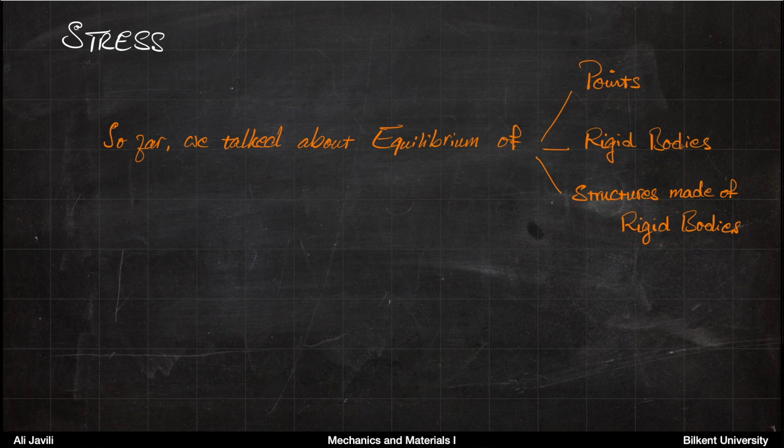Now we want to talk about equilibrium of deformable bodies. That's why we need to talk about stresses, because when we want to talk about deformable bodies, we are interested in the state of the material inside the material. We want to know what is happening inside the material, and stress is a quantity that gives us information about the internal material state.

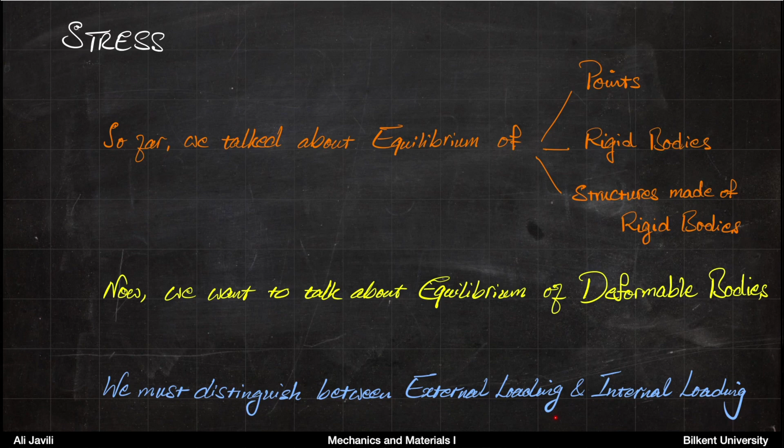So in principle, what we want to do is distinguish between external loading and internal loading. External loading are the usual loads you apply on the structure, such as weight or reactions from the support, and usually you will write governing equations, the balance equations for forces and moments, to compute the external forces.

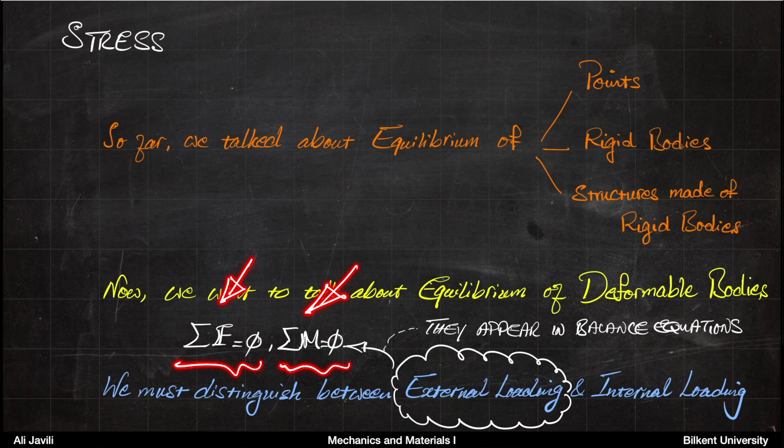And that's what we have done so far. But from now on, we also need to talk about internal loading. Internal loading connects to stresses, and they appear as resultant internal loadings. We will make this more clear through this lecture.

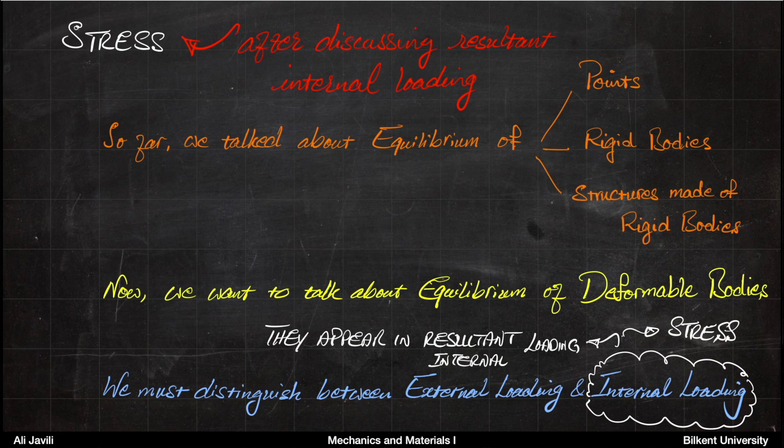So in summary, we have talked about external forces so far. We want to talk about stresses, but before we can, we need to better understand what the internal loadings are, because internal loadings and stresses go hand in hand, and the connection between them should be clear.

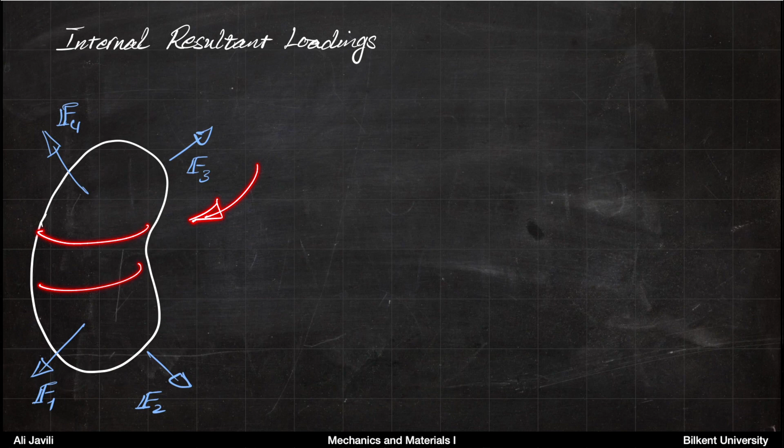Okay, so with that, I would like to talk about internal loadings. For instance, think about a body as shown in the picture. Imagine this is a three-dimensional object, and on that object you have external forces. For simplicity, imagine you have only 4 external forces applied on the body: F1, F2, F3, and F4.

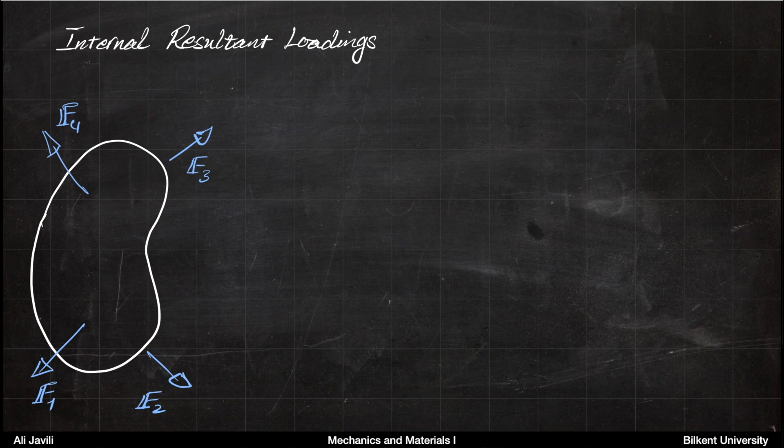What I want to do next is cut this body to make a cross section through it, say through its center, as shown in the picture. And I want to show what happens on that cross section.

If you cut the body, you will see that there are a lot of interactions between the points from the upper part of the body and the points on the lower part. These interaction forces on that surface look like this: very tiny forces acting on different points on the body. Since this is continuum mechanics, a continuous material, I have only drawn a few of them, but you can imagine there are infinitely many.

But then, if you remember, we have learned that if you have several forces acting on a body, you can always replace that by a single force and a couple. So you can replace it with a force-couple system, and that's what we want to do.

So instead of all these tiny forces, we will only be talking about this resultant internal force and this resultant internal moment. This is the resultant internal moment, and this is the resultant internal force.

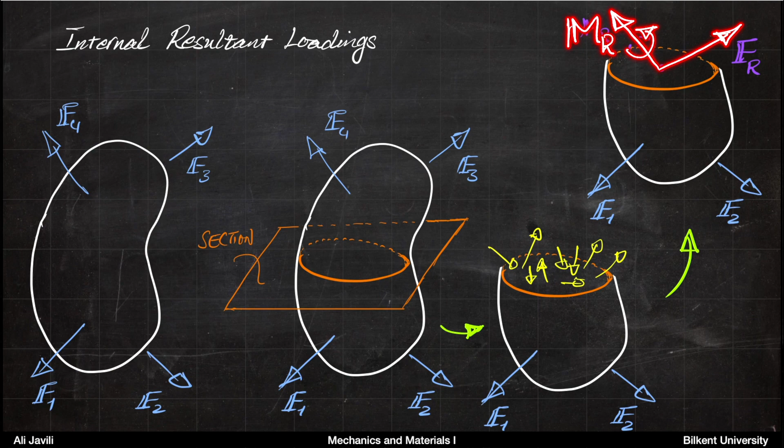Now pay attention, these are internal forces, and they will be in equilibrium with the external forces that remain on that part of the body.

Also remember that the resultant forces and moments are only useful definitions for calculations. Otherwise, in reality it's always a distributed force state like this, but that's usually very complicated to handle in calculations, so we replace them by resultant forces and moments.

Also remember, if I just cut the upper half of the body instead of the lower half, I would see a picture like this. So basically what happens between the upper half and the lower half is this action-reaction kind of scenario.

So whatever force you have on the lower half as a resultant force is caused by all those little forces, whose reactions on the upper body would also exist. So whatever you get for your resultant force, you also get a reaction for the resultant force.

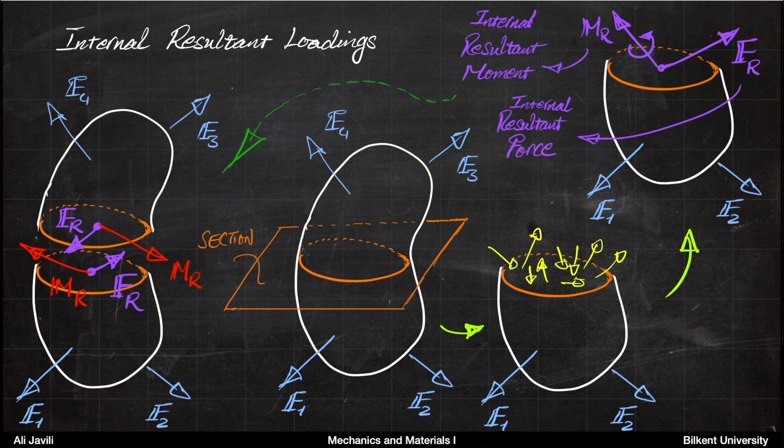This is interesting because usually for external forces, you just talk about one single force with a direction and a magnitude. But for internal forces, you should immediately ask yourself: are we talking about the resultant force on the lower surface or on the upper surface? Internal loadings always appear as combined action-reaction pairs, as opposed to external forces that are always single forces.

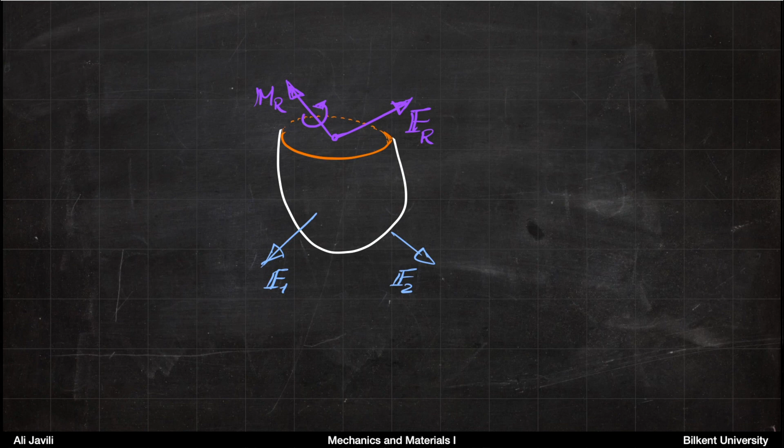Let's talk about that a little more. If we focus on that cut out of the body, and assume that you have the internal resultant force and internal resultant moment, you can imagine that, similar to before, you can also project these forces and moments.

Two types of projections are of particular interest for us. One is the tangential projection, whether for the force or the moment. Here I'm talking about the moment on the left, and on the right the force. If you think about the resultant force Fr and look at the tangential projection of that onto the plane itself...

This will cause a shear. You can imagine this would be a force that wants to cut the material like with scissors - it has this shear type effect. Whereas the normal component is our usual normal force, and it wants to cause an extension or tension in the material. These two components, normal resultant force or tangential resultant force, do two very different things, so we distinguish between them.

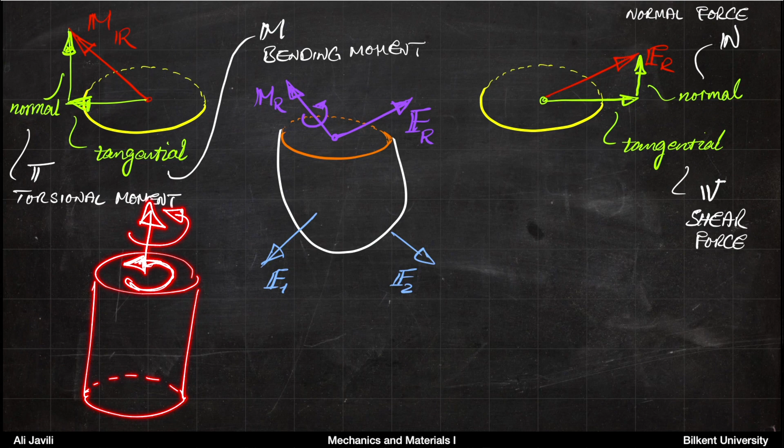We call this torsional moment, also called torque. And you can imagine it wants to result in twist.

Whereas the tangential component of the moment wants to cause bending. This example is slightly difficult to show, but imagine you have a bar, maybe with a rectangular section. If you have a moment like that, it wants to cause bending.

If you think about a moment like this, it's essentially a moment which is tangential with respect to this direction. So essentially, you talk about torsional moment, which is the normal component of the moment, and bending moment, which is the tangential component of the resultant moment.

So again, we have basically four components to look at, and we always decompose these separately. If you think about the same cutout here, instead of the resultant force Fr, we always talk about the resultant shear force and the resultant normal force. The sum of both of these together would eventually be exactly Fr, but Fr alone has this mixed nature.

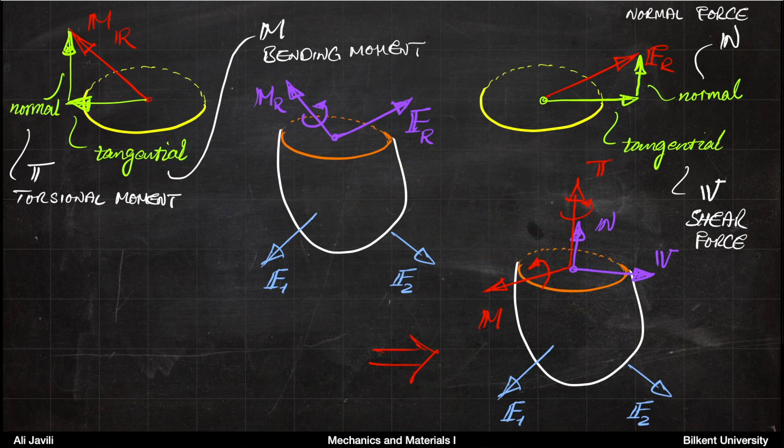In summary, when we want to talk about internal state of the material or internal resultant forces and moments, there are four quantities of interest. One is the normal force N, the next is the shear force V, and these two are essentially the components of the internal resultant force. Then we have torque or torsional moment and bending moment M, and these two are the components of the internal resultant moment.

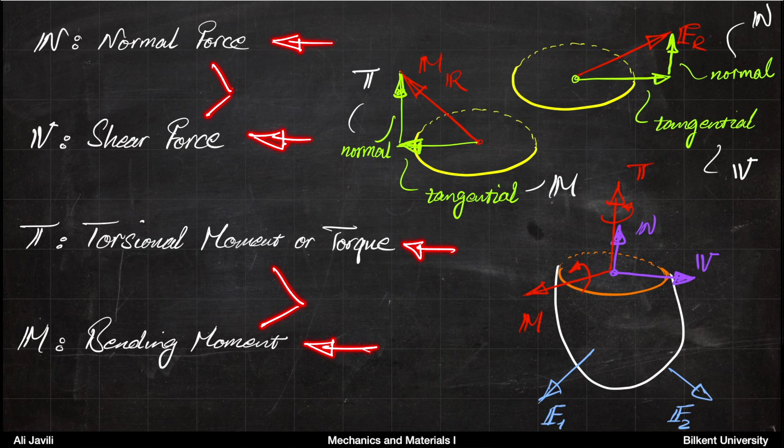To better understand that, here's some additional explanation. The normal force N is perpendicular to the cross-sectional area and is developed to resist against pull and push due to external forces. For instance, think of a simple spring under extension by external forces. If you cut the spring in the middle, the internal force state inside the spring would be a normal force.

If you think about the shear force, on the other hand, the shear force lies on the area, and you can imagine that the shear force is orthogonal to the normal force, and their dot product is therefore zero.

The shear force is developed when external loads tend to slide two segments of material over one another. Imagine a deck of cards stacked on top of one another. When you deform them like this, the forces you need to do this type of deformation is the shear force, because you want to slide segments of material over other segments. Again, if you think about scissors and how they cut material, it's usually through this type of shear force.

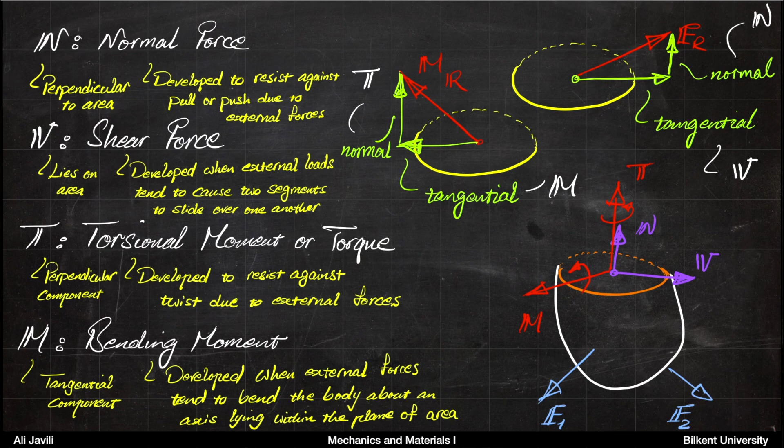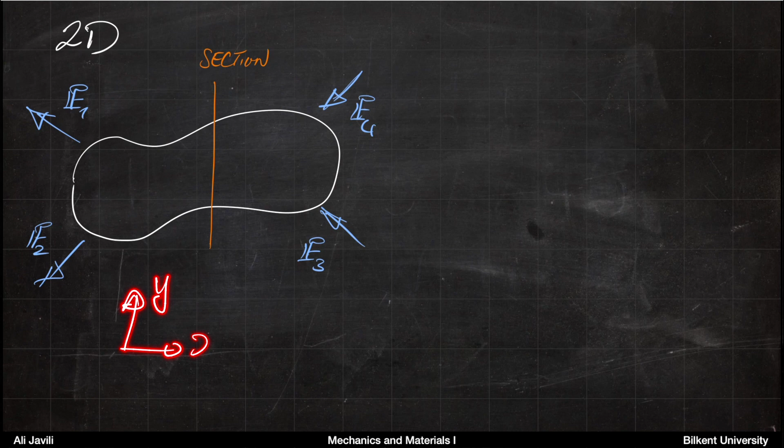But before coming to the exercises, let's see what happens for a two-dimensional problem. It's exactly the same story, just easier to think about. If the coordinate systems are x and y, and you have this cross-sectional area and cut the body through it, you can again think of these different types of reactions, except that in this case you would only get the bending component of the moment, or the tangential component. The torsional component would be out of plane, so in a two-dimensional problem we cannot show it or work with it. So for a two-dimensional problem, you talk about normal force, shear force, and bending moment.

Remember, for a two-dimensional problem, you usually have three equations for equilibrium: balance of forces in the x direction, in the y direction, and balance of moments. If you assume this is your coordinate system, the balance of forces in the x direction gives you the normal force N, balance of forces in the y direction gives you the shear force V, and balance of moments with respect to any point gives you the bending moment M.

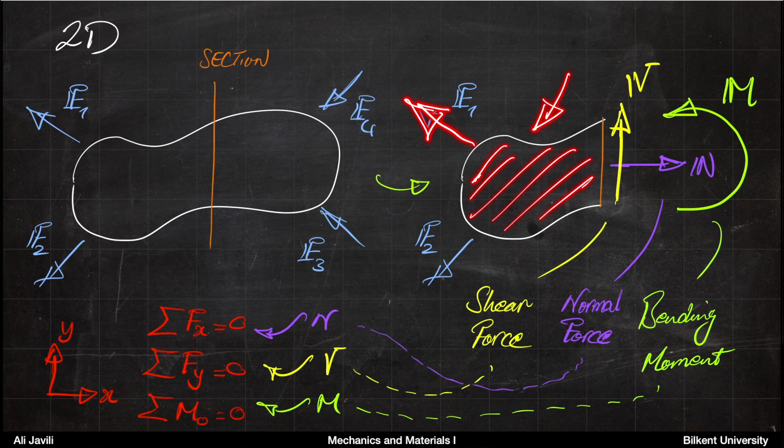Remember, these are internal. We had forces and moments before, but these are internal forces. So you write this balance of forces as the balance of internal forces versus external forces on a section of the body. If you look at that section, on the left part you have external forces, on the right part you have internal forces and moments.

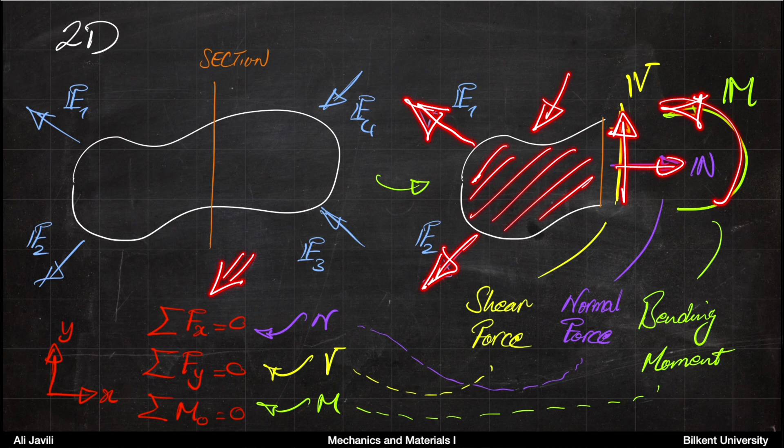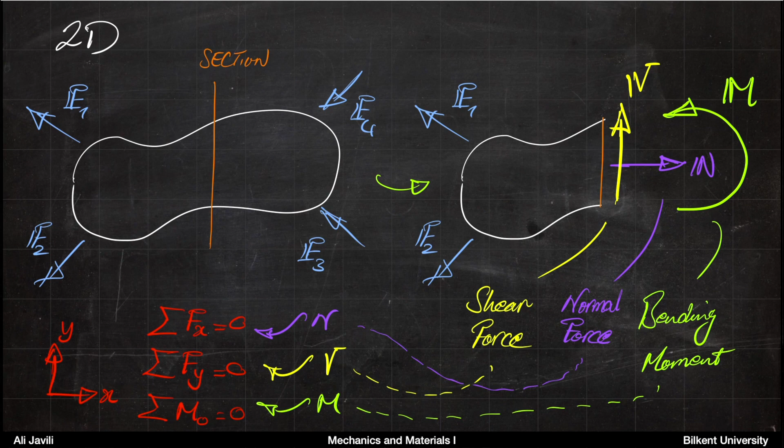Now these balance equations are the same equations in principle, but they have this interesting feature that they include both internal and external reactions, or forces, inside them.

Okay, so what we want to do and the procedure for analysis for the examples that come are essentially similar to what we did for method of sections. So when you want to calculate the internal forces and moments, whether it's a 2D problem or a 3D problem, you need to cut the material at a cross section of interest.

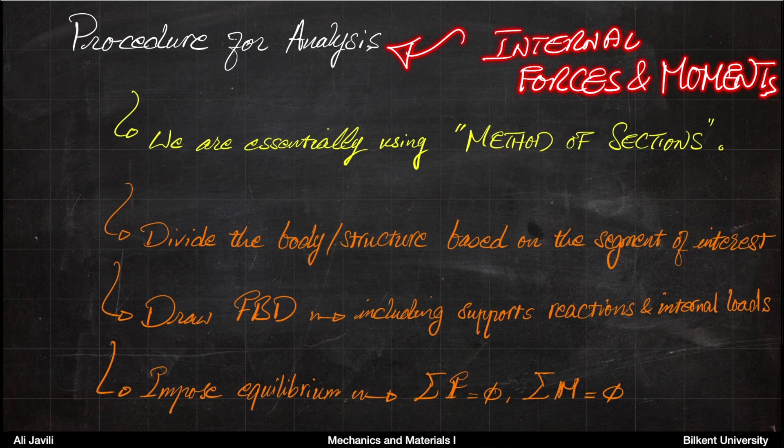Once you cut the material at that cross section of interest, which looks very similar to what we did in method of sections, then you divide the structure based on the segments that you get. So if it is one cut, then you get, let's say, left and right segments. And then you draw the free body diagram on that.

Remember, for the free body diagram, you should include support reactions and weights, but also you should remember to include internal forces. So these would be external ones together with weights and other external forces, and then you should always have internal loads, and then you impose equilibrium. And as I said, the equilibrium equations have this interesting mixed feature that they include both internal forces or internal loads and external loads.

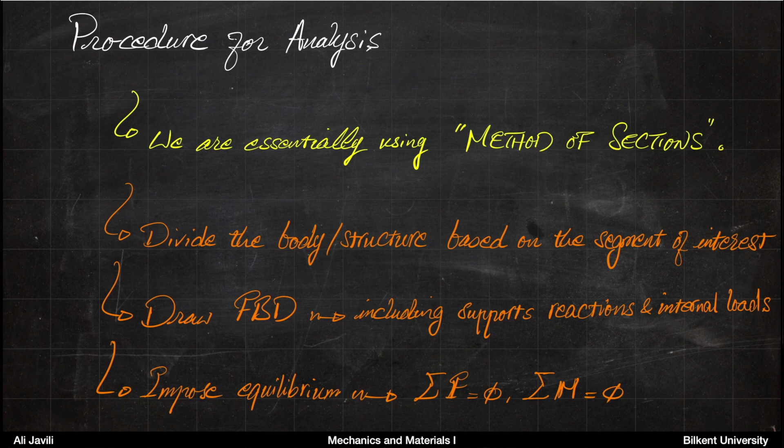We have two examples that come now, and we will learn these through exercises together.

Our first exercise today is similar to problem 1.1 on page 11 of the Hibbeler book, the 9th edition. Given is the beam clamped on the left hand side, so you have a fixed support here and it can apply forces in x and y direction as well as a moment.

On top of the beam, you have a distributed load as shown in the figure. It starts from 0 and it comes all the way to 270 Newton per meter. You are asked to determine the resultant internal loadings acting on the cross section at C. So basically the question is, if we cut the structure here, what are the resultant loadings? Remember, it's a two-dimensional example, so the resultant loadings would be N, V, as well as M: normal force, shear force, moment.

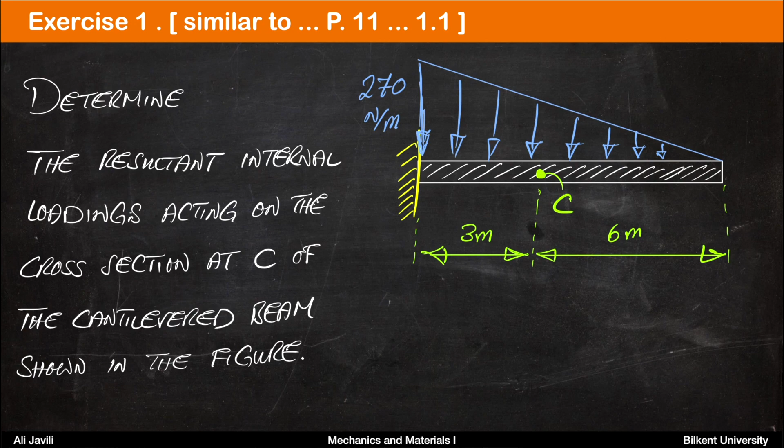Before we start jumping on the solution of the problem, we need to have a very important definition, and this definition appears in all the problems similar to this throughout the semester, and we will have a lot of those. So it's very important that you very well understand what I mean by this definition and this convention.

We have done a very similar thing when we talked about truss structures. Remember, we talked about the forces and force directions. If you talk about external forces and external moments, usually you define their directions based on the coordinate system that you define. Whereas if you talk about internal forces and internal moments, talking about just the coordinate system is not enough, because for instance, you can think about a little cut out of the member like this.

So let's say we cut a little piece here. If you cut a little piece of the material, then in order to have that under tension, you need to have forces in opposite directions anyway. If you want it to be under compression, you should also have forces that are opposite to each other. So you cannot exactly talk about the direction of the forces, because then on the left and the right, they have different directions. So for that matter, we decided to define something better than just direction, better than the usual direction based on the coordinate system.

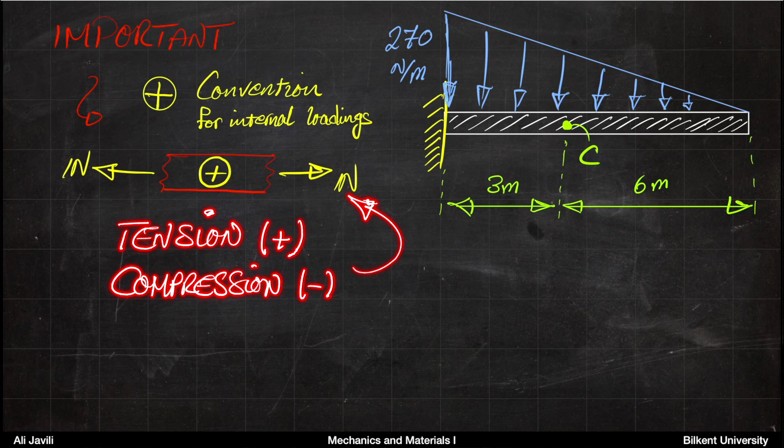Based on this definition, this would be the graphical representation of the convention that we used for the internal loadings, but only for normal force. So for the normal force, that's how we define our plus convention, and this is exactly in accordance with what we did for truss members.

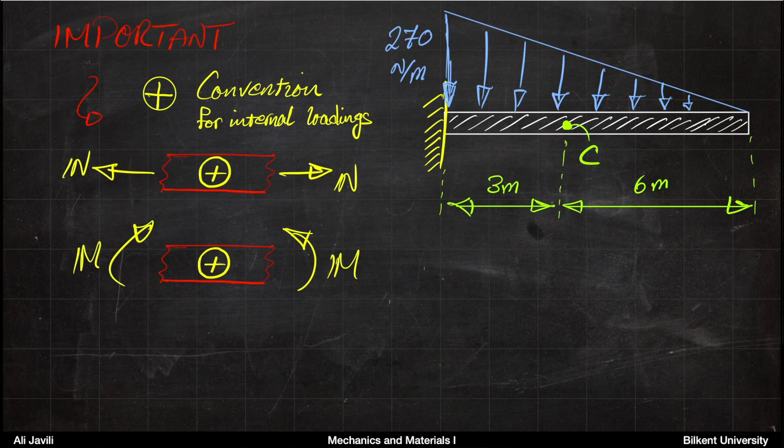Now we do the same thing for bending. For bending, we also need to define a convention, and then we assume that if you have a bending moment, so if the member wants to bend like this, so you can imagine if you pour water, it holds the water - that would be our plus convention for bending moment. And then again, you can imagine on the left and on the right, you would need opposite moments to make that happen, because this thing should be in equilibrium.

Okay, so you cannot say for the whole member what is the direction. On the right hand side, the direction is counterclockwise. On the left hand side, the direction is clockwise.

Okay, so this combination of directions would cause a plus convention for moments. So that's what we call positive moment, positive internal moment. Again, it's important that we are talking about internal moments. And that's where the whole complexity is coming from.

So then we need to also define something for the shear forces. If on the left hand side the shear force is upwards, on the right hand side it is downwards. So maybe you want to imagine that it tries to turn the piece clockwise. That would be our plus convention for the shear force.

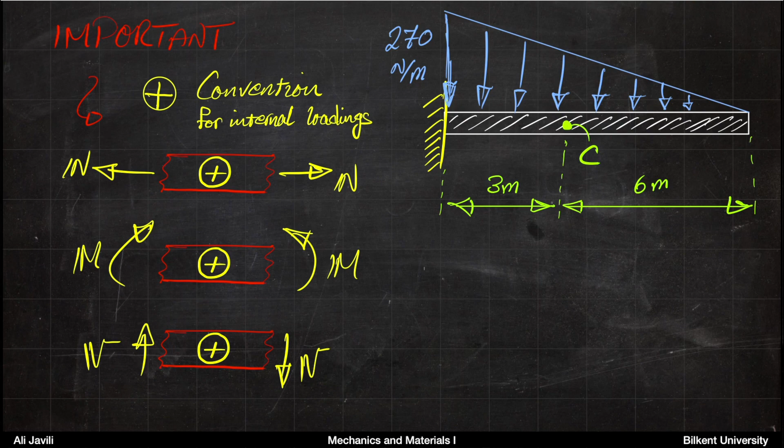Okay, so this convention is extremely important for what we do from now on, and we hold to this for the rest of the problems, for the rest of the lectures in this series.

So in summary, if I want to combine all three of them in one picture, this would be the picture you are looking at. So again, if you talk about normal forces, plus direction for normal forces means on the right edge, it's pointing towards right. On the left edge, it's pointing towards left.

For V, it means on the right edge, it's pointing downwards. On the left edge, it's pointing upwards. And for the M moment, it means on the right edge, it's counterclockwise. On the left edge, it's clockwise.

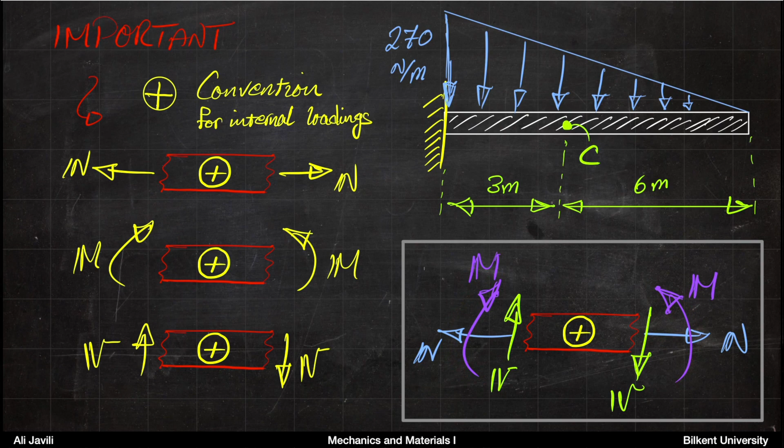So having said that, now we can draw the free body diagram for this system. In order to draw the free body diagram, the first thing we always do is to replace the distributed forces by a single force, by a single equivalent force.

And you can see here the length is 9 meters. It's a triangle. And the maximum of the force density is 270 Newton per meter. That means the area of the triangle is 270 times 9 times 1 over 2, and that would be 1215 Newton.

So that's the value. Where does it act on? What is the location of that? That would basically be the centroid of that triangle. So we know that if it is 9 meters, the distance from left for that centroid would be 3 meters.

From left and 6 meters from right, or if you want to think about it, it's 1/3 times the height from left, and 2/3 of the height from the right, from the peak. Okay, so that's that.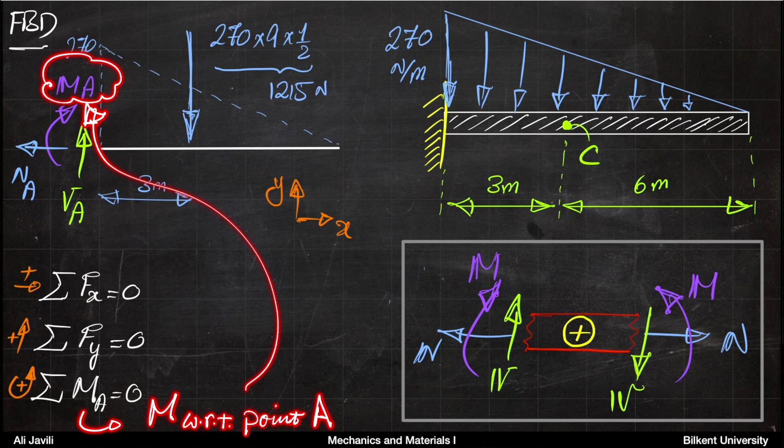Okay, this is not exactly the same as we say here. So here, when I'm writing MA, this is actually the moment at A, but obviously here I mean moment with respect to A. But this shouldn't cause confusion. Although we write both of them as just MA, I think it should be clear if we mean the value of internal moment at A, or we just mean moments with respect to point A.

So if you do that now in the x direction, we have only one force, and assuming that this is the plus direction for x, that force comes with a minus sign, so you get minus NA equals 0.

For the vertical direction, assuming upwards is the plus direction, you get VA upward and 1215 Newton downwards. That's your balance equation in the y direction. Obviously, if you chose different directions for the xy coordinates, you would eventually get the same values for V and N. So it doesn't matter how you choose your coordinate system, as long as you are consistent.

For the moments, the balance of moments with respect to A: you have the equivalent force of 1215 at a distance of 3 meters, and it wants to cause a clockwise moment. We usually assume the plus moment direction is counterclockwise, so that comes with a minus. But also the moment we draw at A, the internal moment at A, is also clockwise itself, so it also comes with a minus.

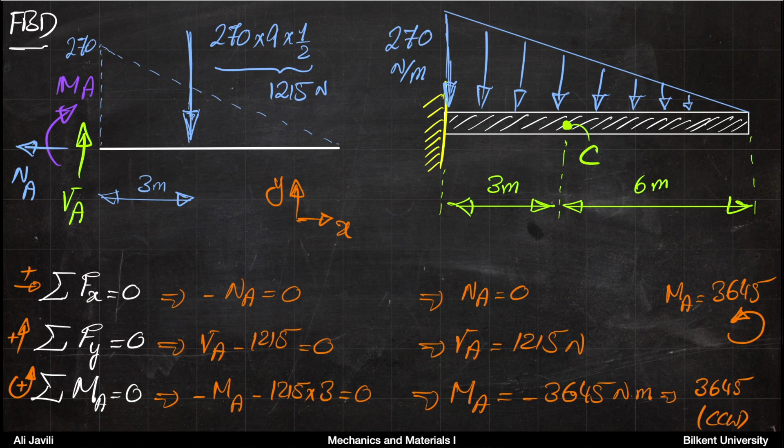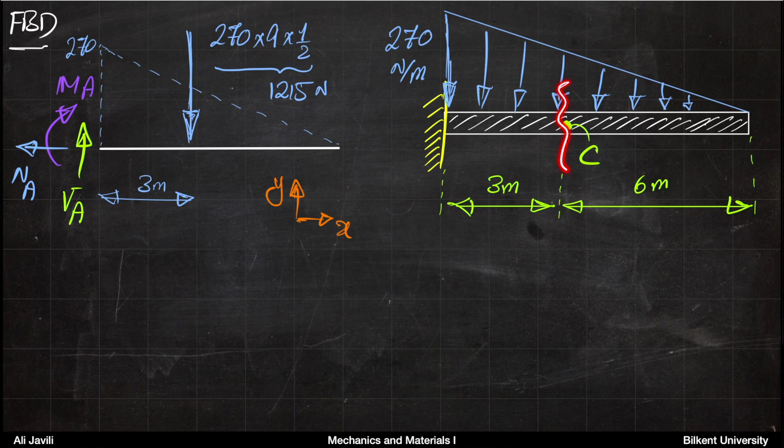So we have that. Now we want to calculate the internal forces and moment at C. What we need to do is cut this structure between A and C. If we cut the structure between A and C, we would have this little part, and then this would be your external forces, your external distributed forces, and then you also have the reactions from A. But also you would have your internal loadings at C itself.

If you put them all together, this would be the new free body diagram. For this free body diagram, I have already chosen the values from the previous part. We know MA is 3645 and counterclockwise, so I already put it like that. And we know VA is 1215 upwards. So we have this. And on C, on the right edge of the cutout, the plus direction for VC would be downwards. For NC, again it's in the extension direction, so it would be towards the right. And for MC it would be counterclockwise.

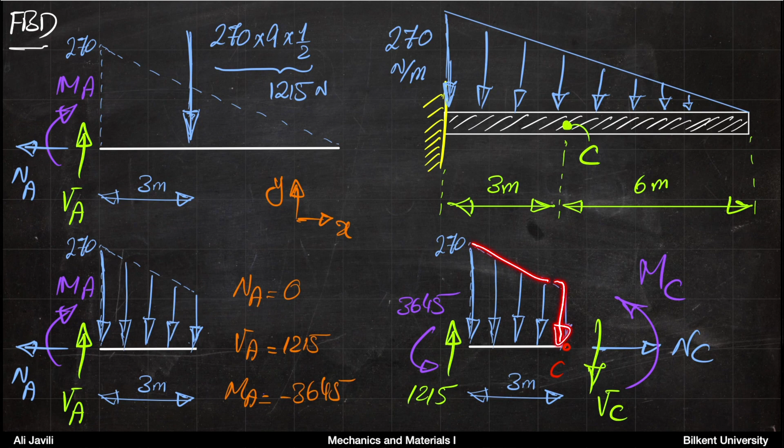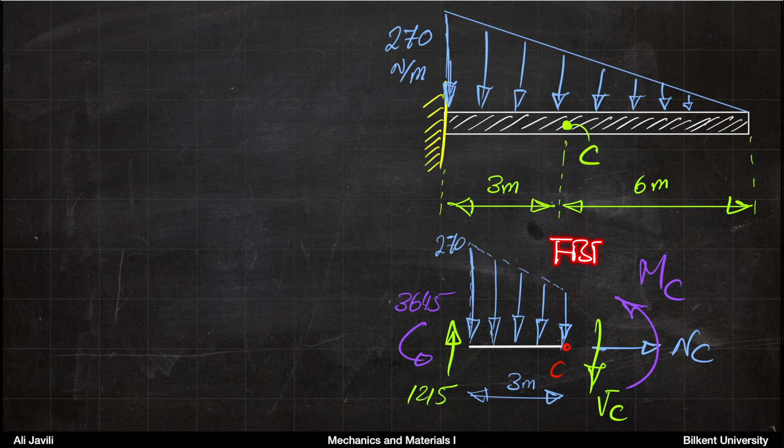All you have to do is treat this free body diagram as you would usually do any free body diagram. The first thing you want to do is calculate the equivalent force for the distributed forces that you have here. If I just clean up the additional parts, this is the free body diagram we want to proceed with.

If I enlarge that piece, you can see you have 270 Newton per meter on the left, but the slope of the line is 270 divided by 9, so it's 30. That tells you that at distance 6, remember this is 0 here, it would be 180 here and 270 here, because the slope is 30. So per 6 meters you get 180, and per 9 meters you get 270.

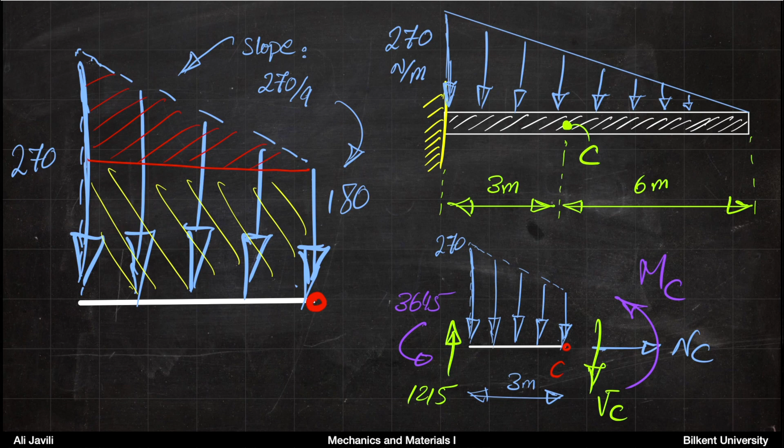So now that we know the state of the distributed load, all you have to do is split this into figures that you can easily calculate. In this case, you can see there is a nice rectangle at the bottom and a triangle on top, and you can handle them separately and add the resultant parts together. If you think about the rectangular part, the distance is 3.

The distance is 3, the height is 180. So the area of that rectangle is 180 times 3, that is 540 Newton, and it acts in the middle. So its location would be in the middle of the 3 meter, that would be 1.5 meter.

If you do the same thing for the triangle, the area of the triangle would be the height here, which is 90, the base is 3, and then you have factor 1/2, so you get 135 Newton for the triangle. And then the distance would be height divided by 3 from the base. In this case, it would be 1 meter.

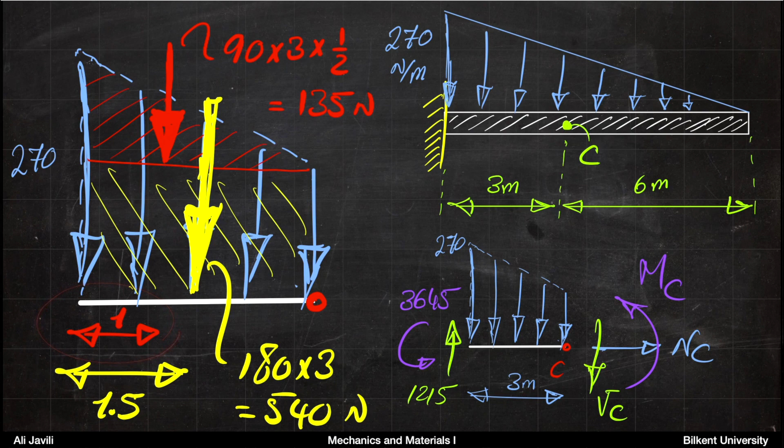So if you put all this together, essentially this is what you have. This would be the 540, the resultant force from the rectangle. 135 is the resultant force from the triangle, and they act at the distances 1.5 meter and 1 meter respectively. And then you have the forces at A, you have these 3 unknowns at C. All you have to do is treat this as a common free body diagram and apply our usual governing equations. In 2D these are balance of forces in the x direction, in the y direction, and balance of moments with respect to a point, let's say A.

If you do the balance of forces in the x direction, you can see you have only NC, so NC would be 0. For the balance of forces in the y direction, you have 540 downwards, 135 downwards, so they both come with a minus. You have 1215 upwards, and then you have VC downwards. So you get VC to be 540.

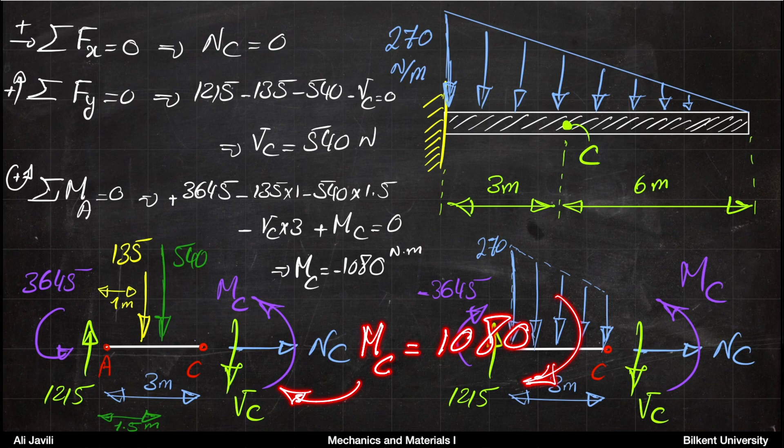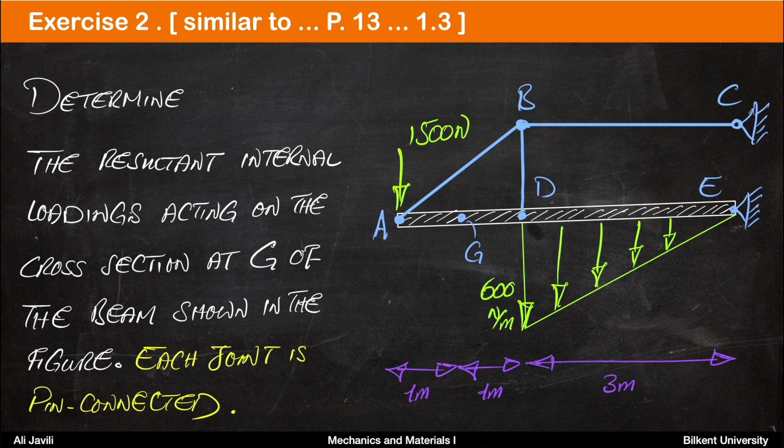So that's what we do. We start with the free body diagram of the entire system. If you draw that, then at point E and C, you would get reactions in both x and y directions. They are both fixed, or hinged, so you get two forces. None of them is a roller, so each of them would give you two unknowns.

Then you replace the 600 Newton with one equivalent force. So it's 600 times 3 times 1 over 2, so the force would be 900. And the distance of the force from D would be 1 meter, again one third of the height, or 2 meters from E, as it's shown here.

Okay, so this is the free body diagram. Now, from this free body diagram, we need to calculate the support reactions. However, there is a little problem here, because we have a two-dimensional problem. We have three equations, our usual governing equations, and that's all we have. And we have four unknowns. So what do we do?

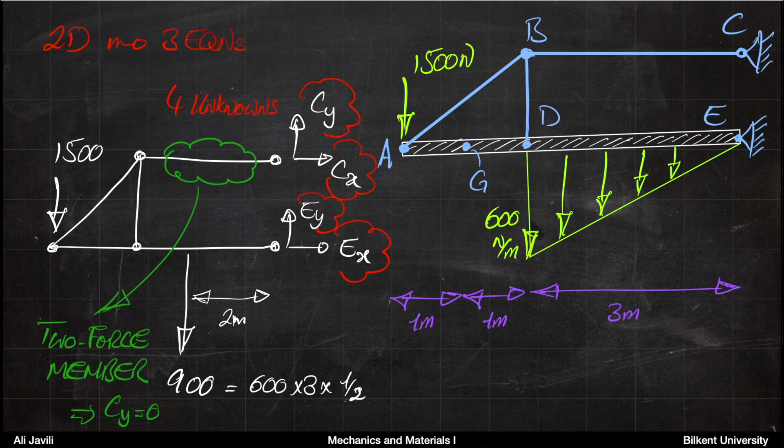So basically that tells us that Cy cannot exist. The only force that you can have along the member would be Cx. That's a huge relief, because now you know you only have three unknowns and you can solve them with your three equations. The three equations, again, we do balance of forces in the x direction, balance of forces in the y direction, and balance of moments with respect to any point, in this case with respect to point E, and we also pay attention to the plus direction as we always did from the beginning of the course.

So this is a very standard problem right now. All you have to do is write these balance equations. In the x direction you get Cx and Ex, so the sum of Cx and Ex is 0. In the y direction you have Ey upwards, you have 900 downwards, and you have 1500 downwards, so they come with a minus sign.

And then with respect to point E, if you want to write the moments, assuming counterclockwise is the plus direction as we did, you can see that the force 900 would be multiplied by a 2-meter arm, and it wants to cause a moment in the counterclockwise direction, so that comes with a plus sign. Then you have the force 1500 with the distance 5 meters that also causes the moment in the counterclockwise direction, so also comes with a plus sign. So 1500 times 5 meters.

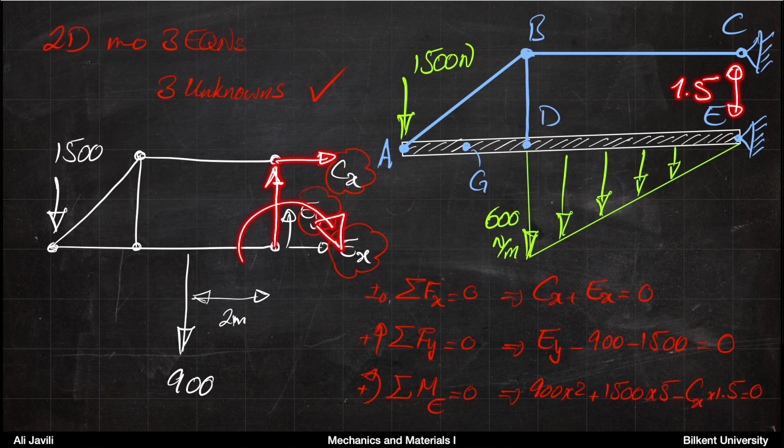And then the force Cx has the distance of 1.5, so the distance between C and E is 1.5, and it wants to cause a rotation in the clockwise direction, so it comes with a minus sign. So basically you get these three equations, and from three equations you can calculate the three unknowns. Cx would be 6200, Ey would be 2400, and Ex would be minus 6200. And that makes sense because you can imagine these two forces are the only forces in the horizontal direction, they need to cancel each other, so one of them is just the opposite of the other one.

Okay, so until now we have the reactions from the supports like we usually did for truss structures. The next thing we want to do is move forward and calculate the force in AB. In order to do that, we need to split the structure.

So if you think about it, you can cut this at member BC, or basically you can imagine, similar to what we did in method of joints, since we know Cx is 6200, FBC would be 6200, and that would be a tension, so it comes with a plus sign. From the direction you can clearly see this is a plus direction, it's a tension.

So what you want to do next is basically write the equilibrium of forces on joint B. On joint B, now you know FBC is 6200. You don't know what FBA is, you don't know what FBD is. So you don't know this, you don't know this, you know this one. But then you basically have two unknowns and you have two equations.

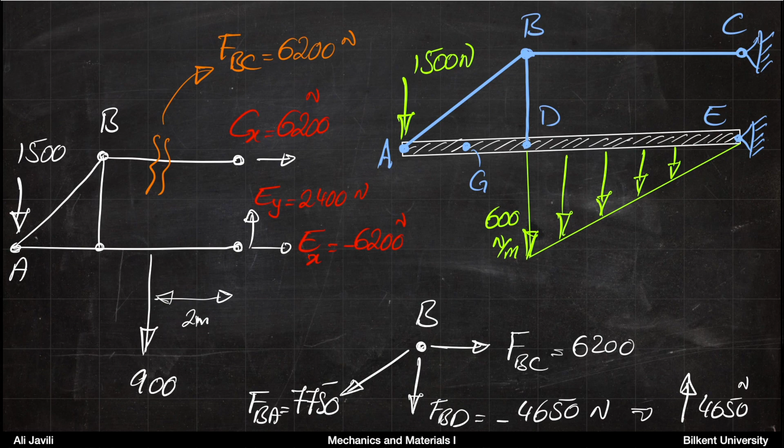All right, we are almost there because now you know exactly what is the force in member AB. And once you have that, you can cut the structure like this, and we can tackle the main part of the problem, which was to find the internal loadings at G.

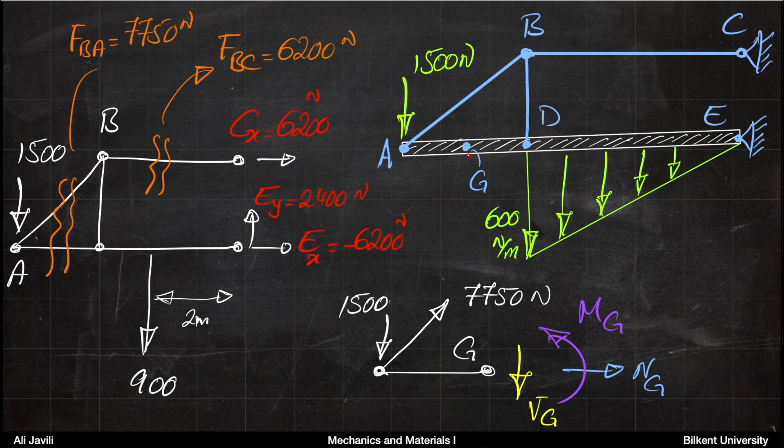If you cut the structure like this, you know that at A, you have just 1500 Newton downwards. You have FAB, again in the tension direction, so that's 7,750 Newton. And then for G, you should remember our convention.

If you cut it like this, G is the right end. So the convention would be to have the shear force downwards, the normal force pointing towards right, and the moment to be counterclockwise, to be positive. So we draw them, and now you have a much simpler problem to solve.

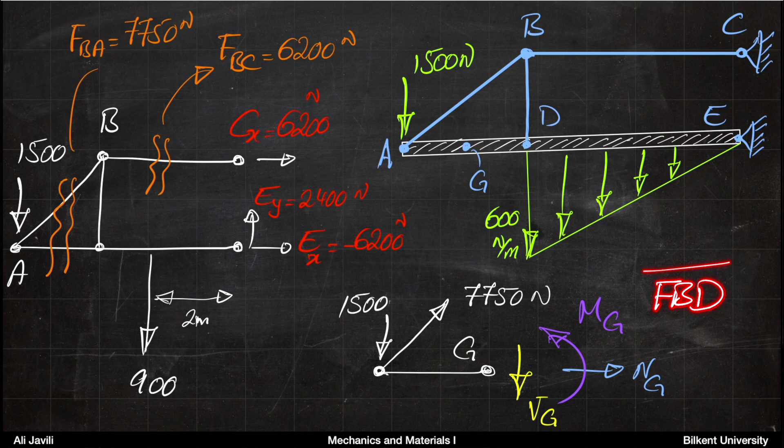It's again a very, very common problem. It's exactly like a free body diagram, and all you have to do is write your balance equation for this free body diagram.

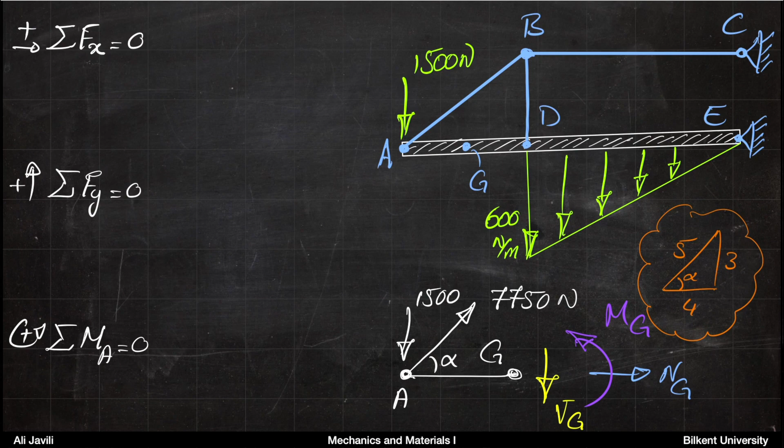Also, remember that this angle alpha follows the famous triangle. The distance here is 2, the distance here is 1.5, so basically the distance AB would be 2.5. So it has the 3, 4, 5 triangle. So we know what alpha is, it's not an unknown. Anyway, this is the free body diagram.

And then you can write your governing equations again: balance of forces in the x direction, in the y direction, and balance of moments. At this point, you just treat this as usual, as if these are all external forces. You don't have to be concerned about anything.

In the x direction, you would have Ng plus the horizontal component of the force, so 7,750 times cosine alpha, the sum of those would be 0.

In the y direction, you have 1,500 downwards, Vg downwards, so they appear with a minus. And then you have the vertical component of the force in AB in the upward direction, so that would be 7,750 times sine alpha upward, so it comes with a plus sign.

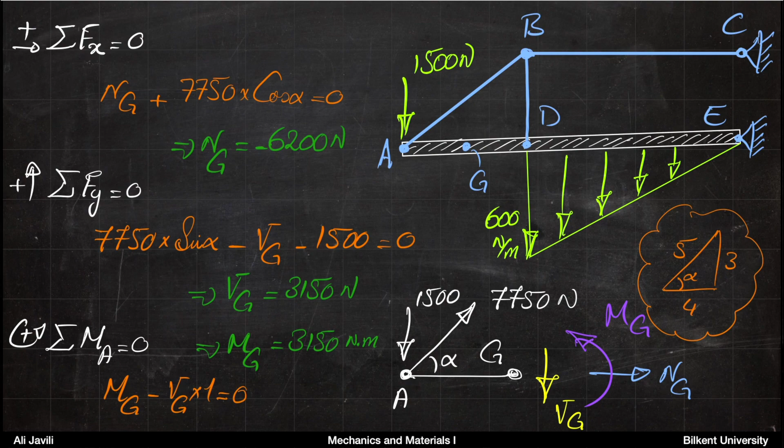So remember what was our initial goal of this lecture. We wanted to talk about stresses, and we said that in order to talk about stresses, we need to talk about these other quantities that go hand in hand with stresses, and they were internal forces and moments. So at this point, we know the internal forces and moments. We know what they are, we know how to handle them, we had 2 exercises on them, and based on that, we can come to stresses, and we can explain what stresses are.

Remember the body cut out that we had previously. We said if we have a body and we cut it somewhere in the middle of this body, let's say if you have a cross section, you would have a lot of forces acting on that cross section, and these are internal forces. So we are talking about the internal state of the material.

Now you can imagine each of those little forces is acting on a little incremental area. If you assume this is your coordinate system xyz, you can assume that your area in this particular example is exactly aligned with the xy plane, so that little incremental area is also on the xy plane. So if you think about your force delta F, it has three components: in the y direction, the x direction, and the z direction.

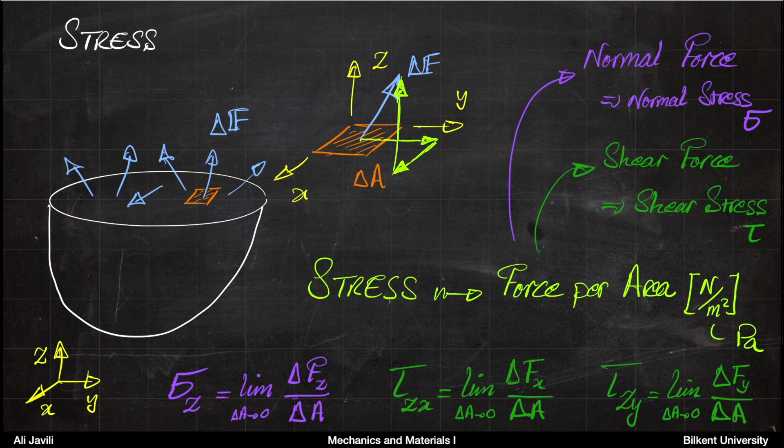So to summarize how this works: think of that normal plane. It has a unit vector orthogonal to it. So that little incremental area has its own normal vector, and in this case the surface normal vector is k. For that matter, we have these z indices here, so the first index in a way. As I said, when you want to define this, you can write delta A also with an index to make it more clear.

But then you also talk about the components of the force. If the component of the force is x or y, then you use that component as the second index. If you talk about the normal stress, it makes no sense to write the same component again, because you know it's a normal stress. So you can imagine sigma z is equivalent to sigma zz. We know we're talking about normal stress, so we know these two would be the same. It doesn't matter if you say you're showing the first or the second index, they are the same index.

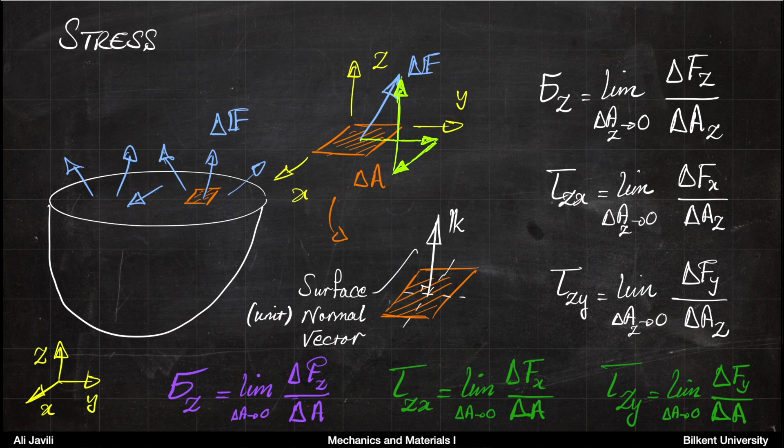So again, to make it very clear, this is exactly how we do it for normal stress: showing it by the letter sigma, one index would clarify the direction and the plane. If you talk about shear stress, then you need two indices. The first index clarifies the plane, showing you the surface normal. The second index shows you the direction of the force. So if you have the letter sigma, you have only one index, and that index is the normal force component as well as the surface normal. If you talk about shear stress, you have two components: the first is surface normal, the second is the shear force component.

So you should kind of get used to it. This is also a sort of convention for showing it like that. You can imagine different ways of showing the same information, but this is how we do it in this lecture and in this book.

Now we want to extend the same idea. Remember this body itself was like an egg shape, and you cut that in the center. Now imagine you make another cut, and you come to this. If you do that, you can see you would have two surfaces on those two separate corners basically.

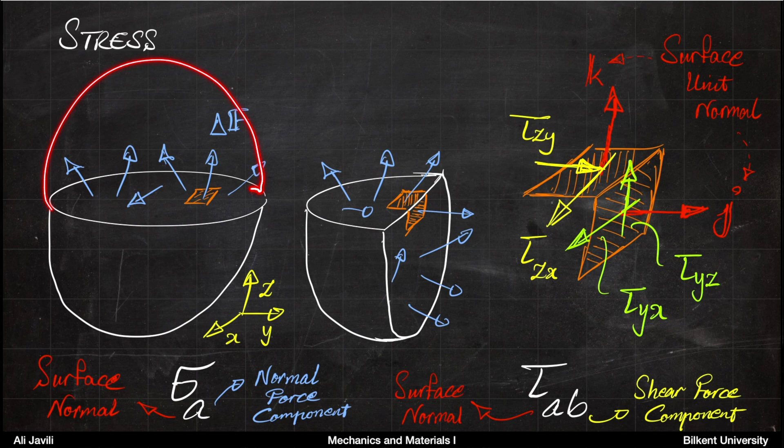So what I want to do next is play the same game. Remember, this was an egg-shaped body, and we cut it once, then we cut it twice. Now I want to cut it again.

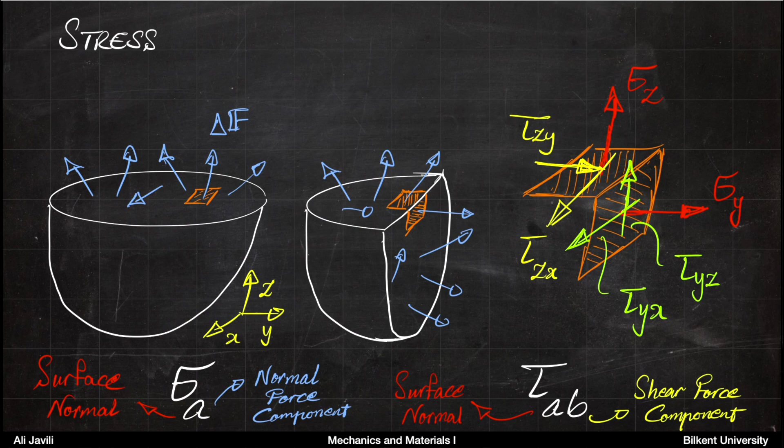Before doing that, I'll tell you that these two normal stresses can also be shown here, but in order to avoid confusion, I didn't show them in the previous picture. Now if you cut it again, you can see that you actually have a cube, and this cube has three surfaces.

Each of these surfaces has its own surface normal according to our usual coordinate system. So on each surface you can play the same game and show the components. I'm drawing this larger figure to talk about the general state of stress at a point.

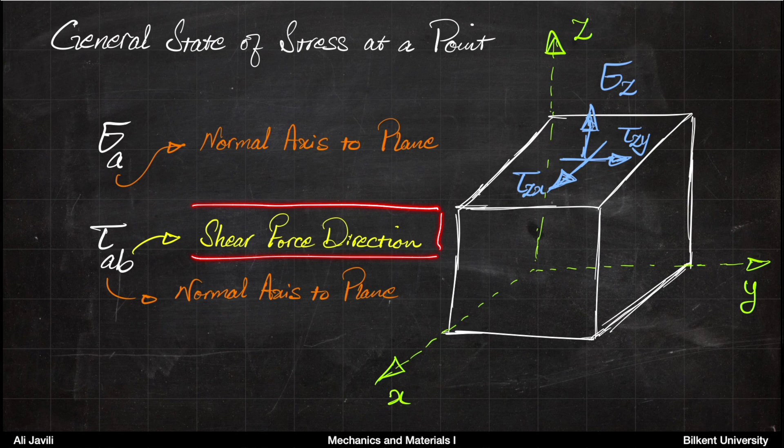Remember, for normal stresses we have only one index, one subscript, and that shows the normal axis to the plane. For shear stress, we have two indices. The first index shows the normal axis to the plane, similar to before. The second index shows the shear force direction.

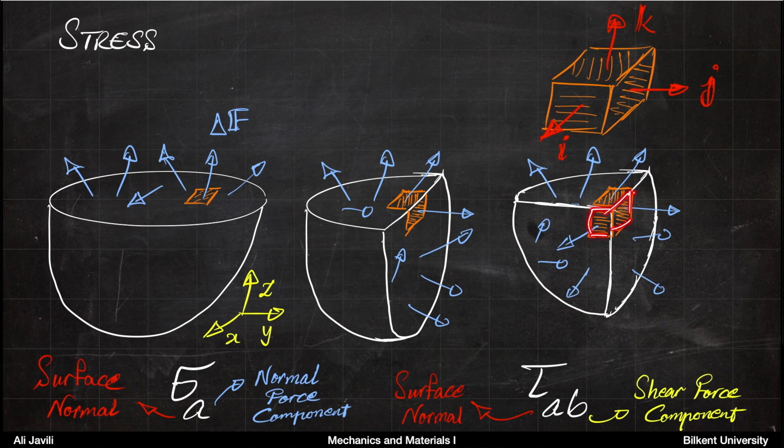Now think of that cube from the previous picture, basically a cut cube from inside the material. If we look at the top surface, the normal axis to the plane would be z, so the unit normal vector to this plane would be vector k. Based on that, we know if you want to write the stress state on that surface, you would have sigma z.

And then you have two components of shear stress. For both of them, the first index is z, so you have tau zx and tau zy. Tau zx points in the x direction, tau zy points in the y direction. So these are the three stresses on that upper surface.

On the side surface, the normal axis is y, so the unit vector normal to this would be your usual vector j. Based on that, the normal stress would be sigma y, and the shear stresses would be tau yx and tau yz. Tau yx points in the x direction, tau yz points in the z direction.

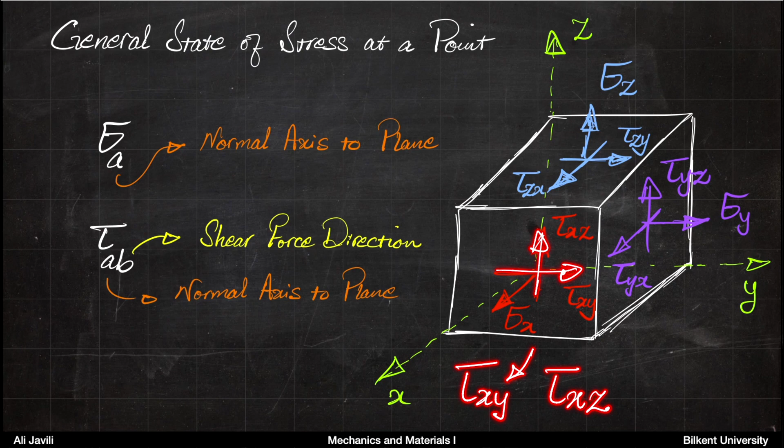So you get, let's say, 9 components based on these three surfaces. You can imagine there are 3 other sides to this cube, and you could play the same game on those, but everything that happens on these sides reflects on the other sides in a sense of an action-reaction type. I'm not writing it, but we'll talk about it in the following slide, and you will see that the stress state has 9 components.

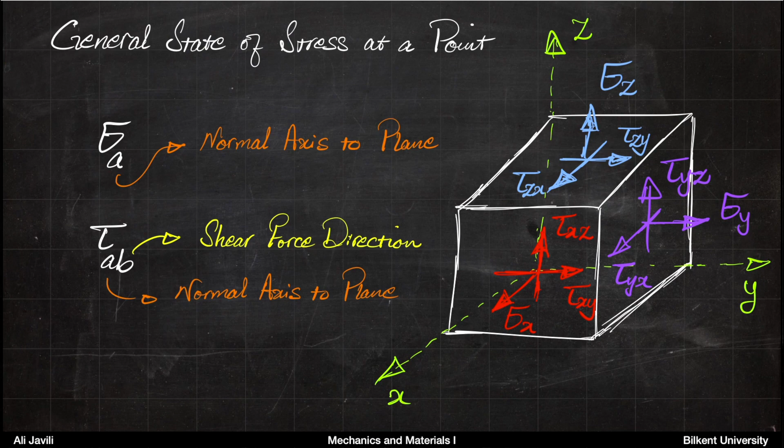So these 9 components are enough to show the stress state at a point. But more importantly, you'll learn that 6 of them would be enough. So it's not even 9, it's actually 6, and we'll talk about that soon.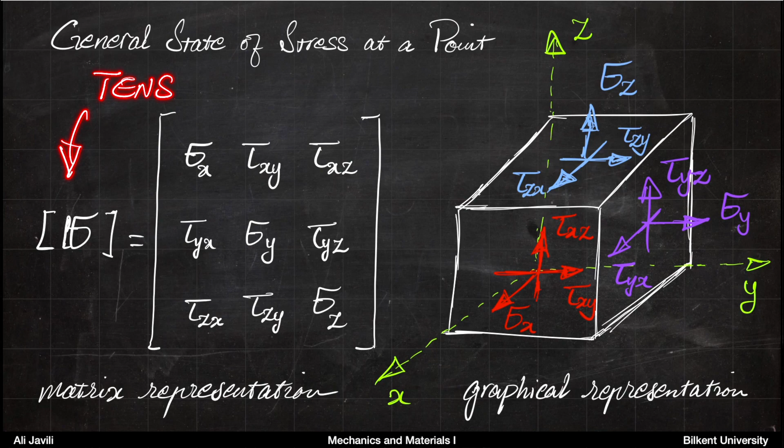For now, just remember this: when we talk about the state of stress at a point, it is not a number, it's not a scalar value, but it's also not a vector. Forces are vectors, but now we're talking about something more complex—precisely speaking, it's a tensor.

It's not a vector, it's not a scalar, it's a more complex concept than just a vector, and we call this a tensor. For you, you can just imagine it's a matrix. This stress matrix is equivalent to the graphical representation that we had here. So when you talk about a stress state at a point, you can either show that stress state using a matrix or using a graphical representation.

You must keep that in mind. You must have this picture in mind, and you must very well understand the structure of this stress matrix. You can see that on the main diagonal components, you have sigma x, y, and z, and then you have tau xy, tau xz, tau yx, tau yz, tau zx, tau zy, and sigma z here eventually. So there is a usual counting on it—you can think of each as one component.

So this would be like the 1 2 component, and if 1 is x and 2 is y, then this would be like the 2 1 component, and then the 2 1 component would be yx essentially. So it has that kind of a structure. It doesn't matter how you want to remember it, but as long as you remember it, I think you'll be able to solve the problems that come with this.

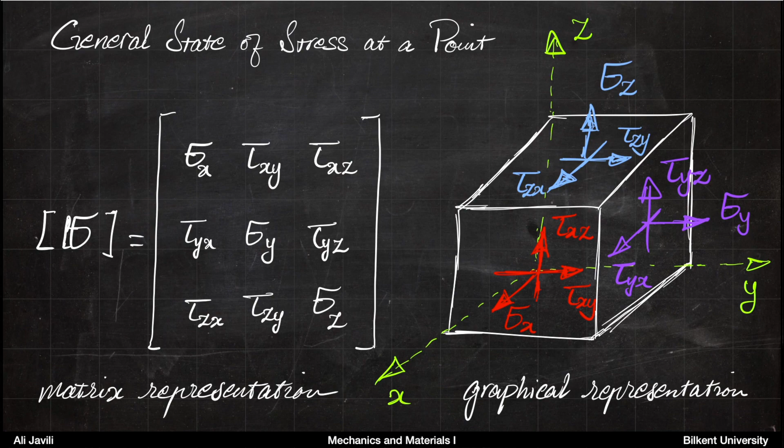To better understand this, we are going to have a few examples together, and we'll show how you can find the stress state from a graphical representation.

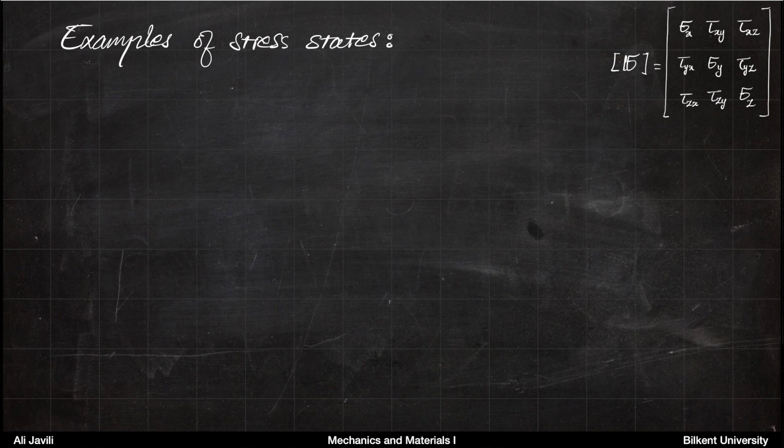All right, so we want to show some examples of stress states in the material and see how we can write them in matrix representation. Remember, this is the matrix representation we talk about. Here is the first example.

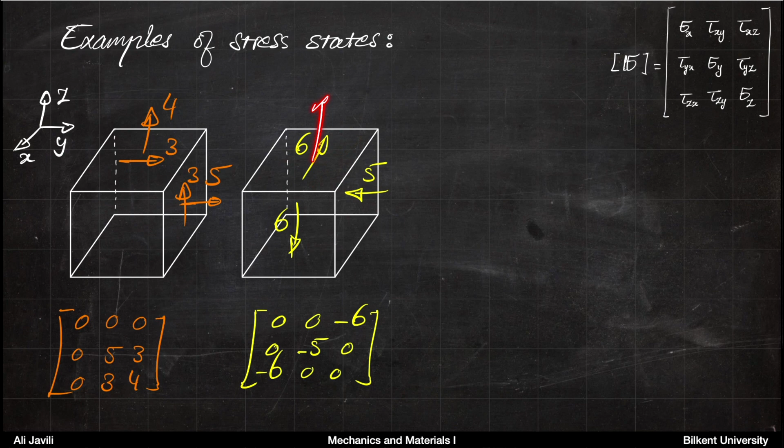On the upper surface, the z surface, you have no component in the y direction, you have no component in the z direction, so normal. You have only this one in the x direction, but then again in the opposite of the x direction, and that is then also minus 6. So you get minus 6, 0, 0. That's example 2.

In the next example, we can see this one. In this one, you can see there is nothing on the normal stresses, so all 3 normal stresses are 0. So basically the main diagonal components are 0, and then you are left only with shear stress components.

Now for the shear stress components, we start from the x plane. On the x plane, that would be the first row, you would have 3 in the y direction and 4 in the z direction. On the y plane, you have 3 in the x direction and 2 in the z direction. On the z plane, you have 4 in the x direction and 2 in the y direction. So you also get that.

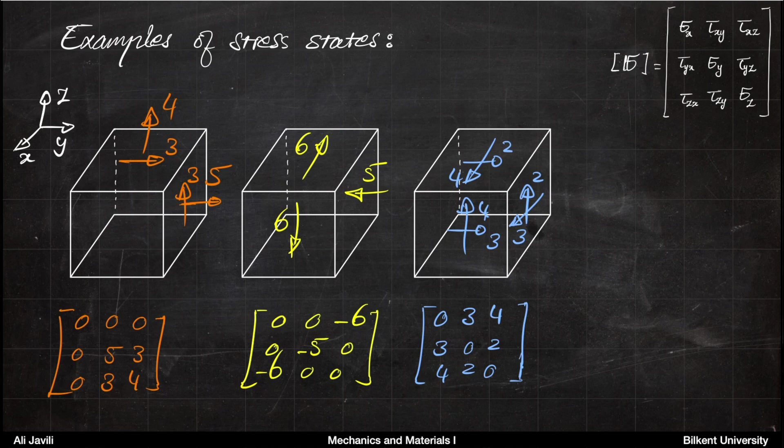Now finally, let's look into another interesting example, kind of opposite to this one. In this one, you had no normal stress and it was only shear stress. Now here you have no shear stress, you have only normal stress. In this case, in particular, all the normal stresses are pushing, so all of them appear with a minus sign. This would be a particular example of hydrostatic pressure.

So if you think about it, usually in fluid mechanics for inviscid Newtonian fluids, you assume that shear stress is 0, and then you only talk about pressures in fluids and liquids. This would be exactly what you would do in fluid mechanics. If this was a fluid mechanics example, you would say the pressure is 2 Pascal. So this is how the concept of pressure in fluid mechanics actually connects to the concept of stress in solid mechanics.

The next thing we want to talk about is the concept of average stress, and then a little more about the components of the stress itself. But before I do that, I want you to pay attention to one interesting fact about all these examples: every matrix here has a very interesting property, and they are all symmetric.

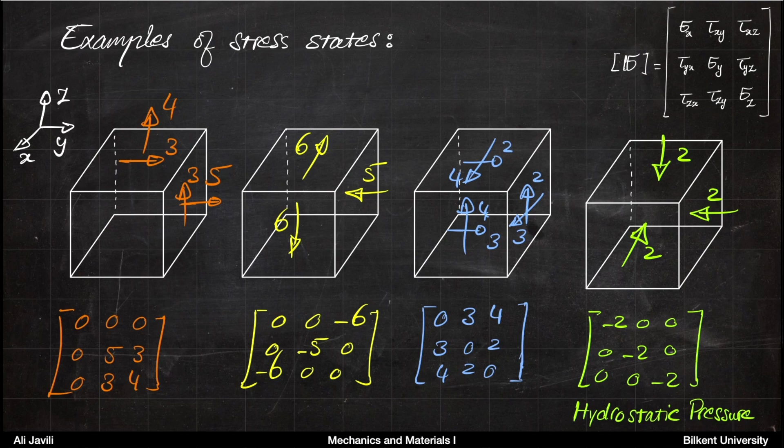Having them symmetric here was just for convenience. These are examples; they didn't have to be symmetric. But we will see that the symmetry of stress is actually a physical property. This assumption that we just assume they are symmetric is actually the correct way of defining stress, or the correct way that stress forms inside the material. We will talk about that next.

The next thing we want to talk about is shear stress equilibrium. If you think of the same graphical representation of stress state that we had, we want to think about what happens to shear stress on this plane and on the plane opposite to that. These are the planes essentially along the y direction, and also we want to focus on the components in the z direction.

Having those two surfaces in mind, we also talk about the upper surface and the bottom surface, where we consider the other shear stresses with similar indices. So you have tau yz. Here I want to talk about tau zy, and then obviously what happens at the bottom.

What I'm going to show you is more like an example to do the shear stress equilibrium. But it can always be done on different surfaces, and you can play this game. What I'm saying is general enough in the sense that we develop it generally, but we just do it as an example for these particular surfaces and directions for now.

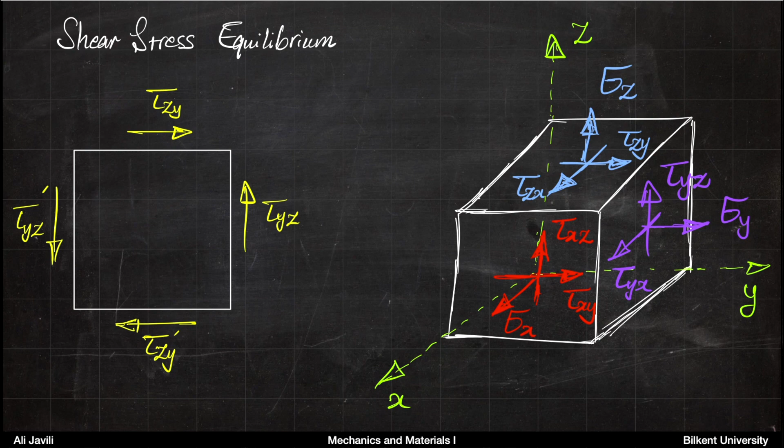The same thing holds here. I have a prime here, and I'm not assuming that they are equal, but it shows the direction according to our convention. It's fine.

If you think about these two sides, on the right and the left hand side, and assume this cube has dimensions delta x, delta y, and delta z — if you multiply this shear stress by the area, you get the shear force. The area here would be delta x, delta z, because this is delta x and this is delta z.

You multiply the area by shear stress and get the shear force, and this is the upward shear force. You do the same thing on the opposite side — multiply shear stress by the area to get the shear force there. But you also know that the sum of forces in the z direction must be zero, so this tells you that these two forces, delta f and delta f prime, must be equal. Because they have the same area, this tells you that the stresses themselves are equal.

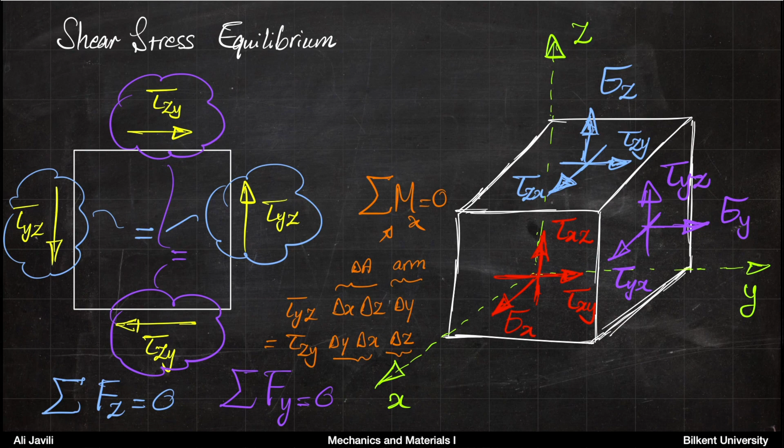Now for them, tau yz would be multiplied by this area to give you the shear force, and then the distance would be delta y. So you get that moment, and that would be the counterclockwise moment. But then tau zy would have the distance delta z, and it will cause a moment in the clockwise direction, and the area would be delta y delta x.

But they should be equal, and you can see now these two are essentially the volume of the cube, and they are equal. So they cancel with each other, and eventually you see that tau zy and tau yz are equal.

Okay, so basically you should remember that at the beginning we didn't assume that the left and right shear stresses are equal, but now we know, because we had the balance of forces in the z direction. We didn't assume these two were equal either. So at the beginning we had a prime here, if you remember, but I'm not writing that prime anymore because at this point we know they are equal. We just proved it. And then you have balance of moments, and we also proved that these are equal.

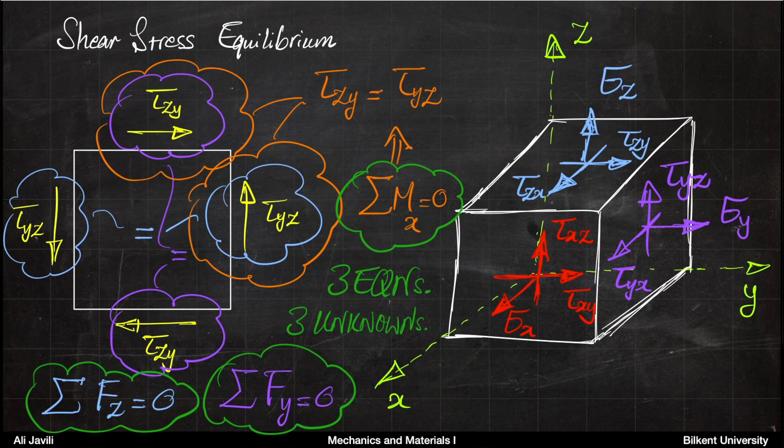So this is a very interesting property, because as soon as I tell you tau yz is something, if you know tau yz is 5, you also know tau zy is 5. Okay? And essentially, coming back to what we did, if we want to summarize it, we just used 3 equations, 3 unknowns, and we solved this problem. But what it means in summary is that stress is symmetric.

And this is what I just told you or showed you in the previous examples. So you always assume tau xy and tau yx are equal, tau xz and tau zx are equal, and tau yz and tau zy are equal. And again, this is not an assumption, this is essentially the consequence of the balance of moments. So that is the way the stress develops in the body to retain its symmetry.

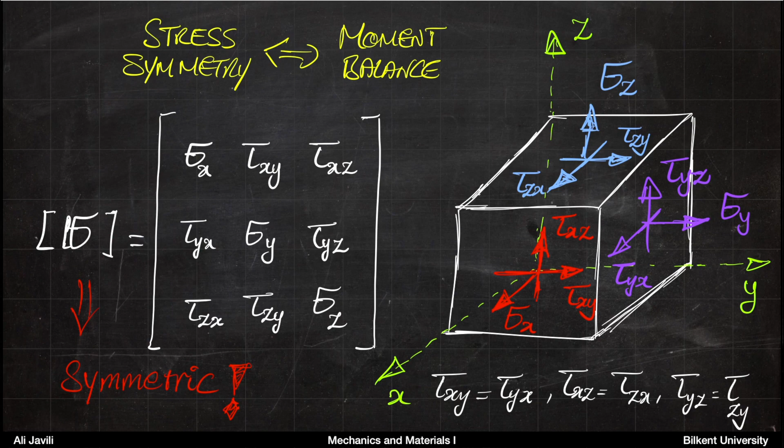Okay, so stress is symmetric. We know that.

One last topic for today. We want to just introduce average stresses. It's a fairly simple topic. So basically, usually we talk about stresses at points, and they are local values at points. But you can also think of average stresses. So you can think, if you have a bar and then you apply a force, obviously stress at different points could be different, but you can always think of an average sense of it.

So instead of always writing it as dF with respect to dA, you can just think of it as the average of the total force divided by the total area. Usually working with these average stresses is a good point to start with your design, and that's why we define it. For the normal stresses, it's just the total force divided by area. For the shear stress, we also define this thing called average shear stress, which is the total shear force divided by total area.

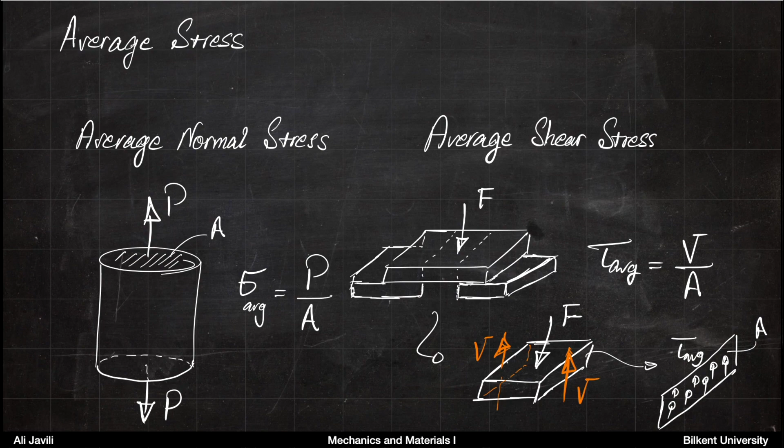So this was our first lecture on the concept of stress. We have 2 lectures about stress, and today we covered sections 1.1 to 1.5 of the first chapter of the 9th edition of the Hibbeler book. We have 2 more exercises on this, and we will do it at the beginning of the next lecture, and then we continue our discussion on stress. Catch you in the next one.